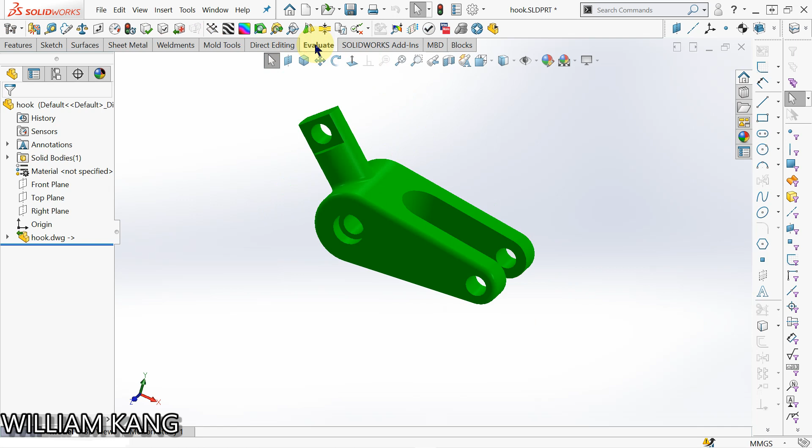So we can do some editing. Okay, let me change into MMGS first. So if you go to the Evaluate tab, you can measure. You can see that the diameter is 38.1.

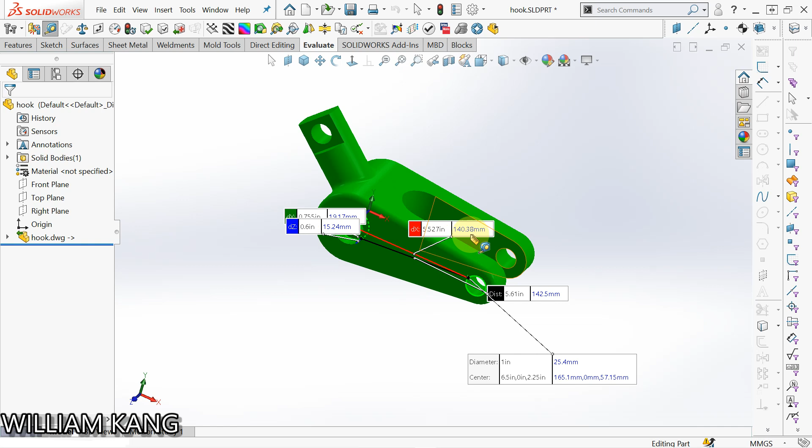So if I click the other circle, it's telling me the distance, 140.38 mm. Okay, escape. So we can measure the model.

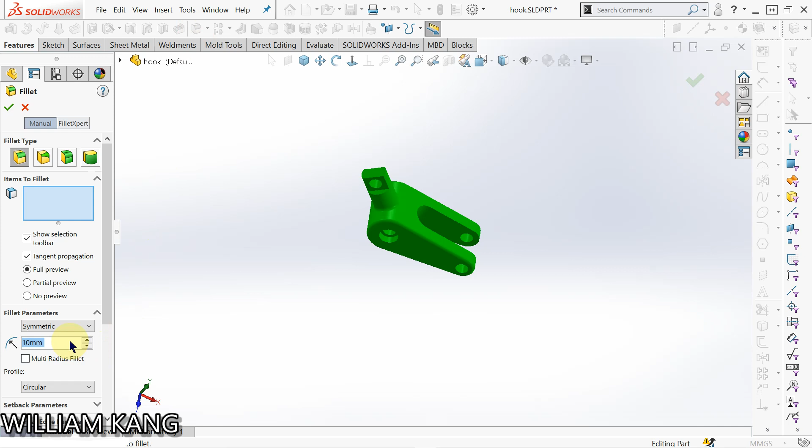Okay, now we are going to do some editing. Let's say we do some fillet. Make it 6 mm. Let's fillet here. I select the face and okay. So you have the 6 mm fillet.

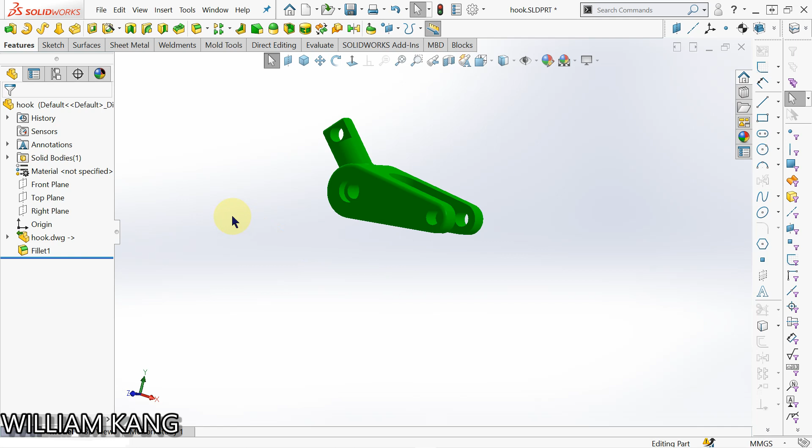So the purpose of importing is that you don't need to redraw this model and you want to add extra features using SolidWorks. Okay, let's make a sketch on this face here. Sketch. Okay, let me draw a circle.

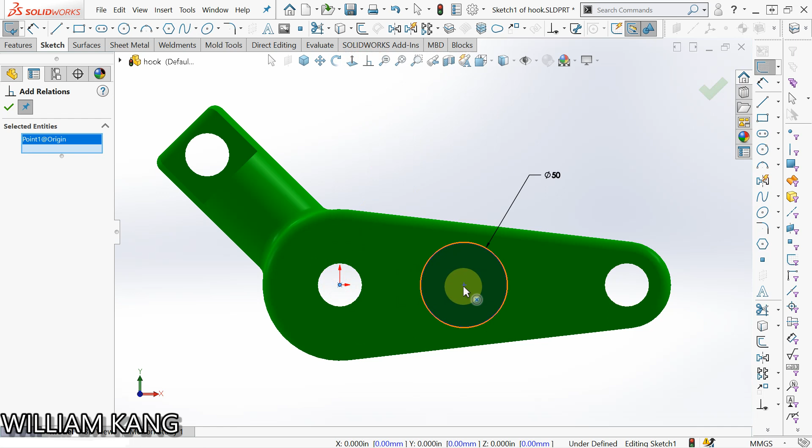Okay, make dimension. Make this one 50. Okay, go to Add Relation. This point and this point, make it horizontal. And repeat again. Add Relation.

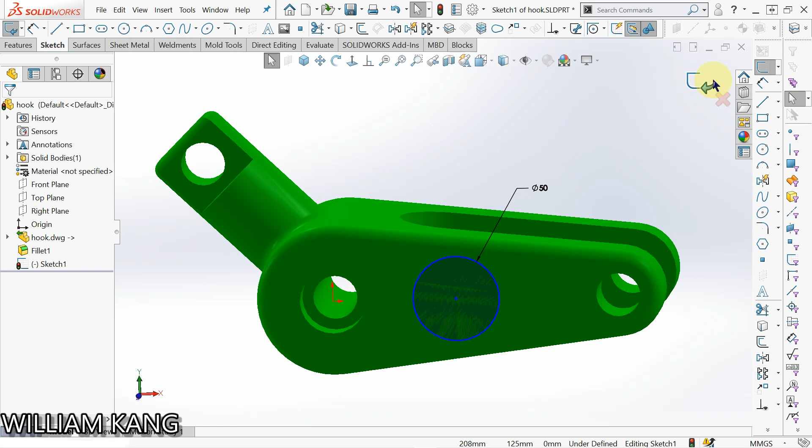Okay, I select this. Control, select this circle. Okay, now we draw a circle there. Let's draw a center line. Okay, make it horizontal.

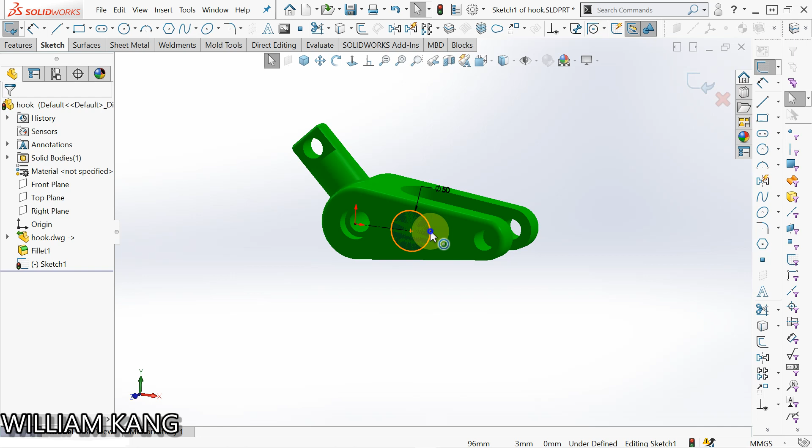So it's under defined. If you want to fully define, you can right click and say Fully Define Sketch, and calculate. So another dimension added, fully defined. Once you want to change it, you just change the dimension, set to 100. So it's still fully defined.

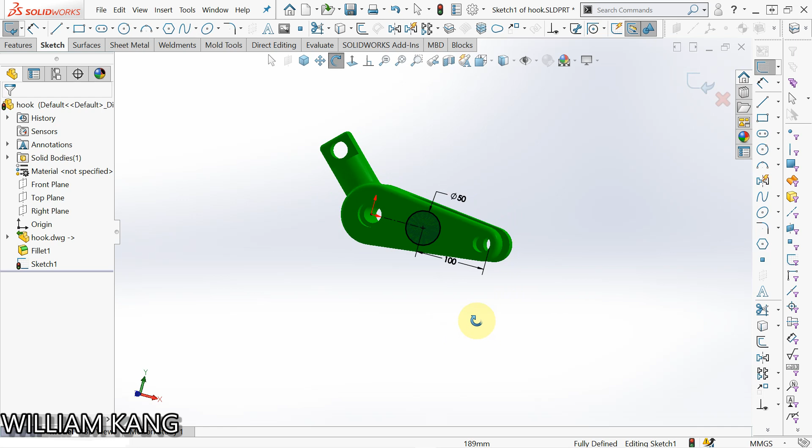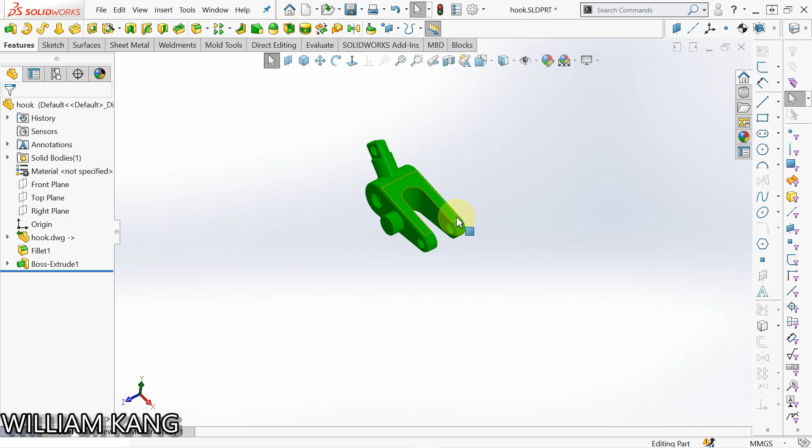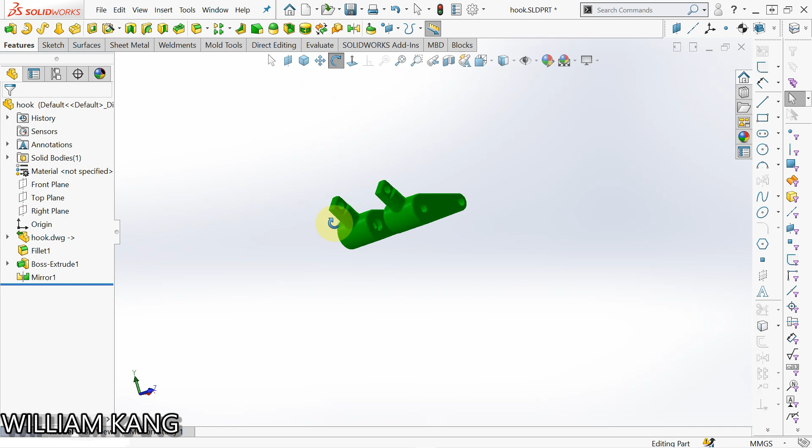So we go Extruded Boss/Base, 30. Okay, now I want to mirror this fork over. So I go to the Mirror command, select this face, and for the feature we use Bodies to mirror the body, and we say okay. So now we can do some editing, making use of the AutoCAD model.